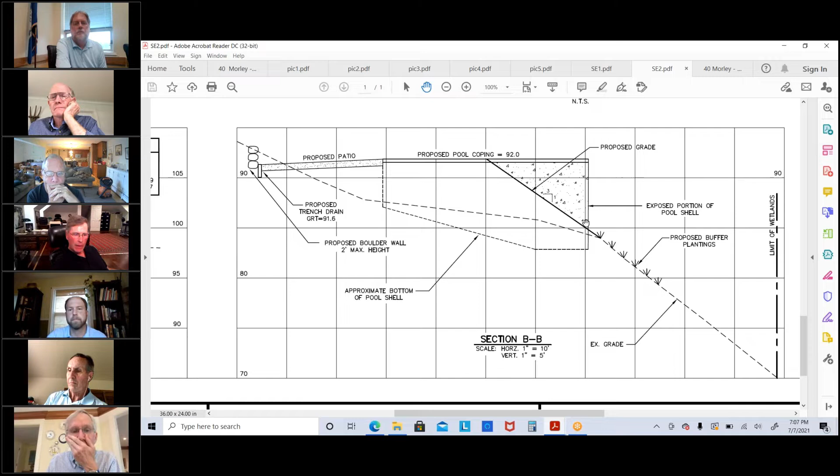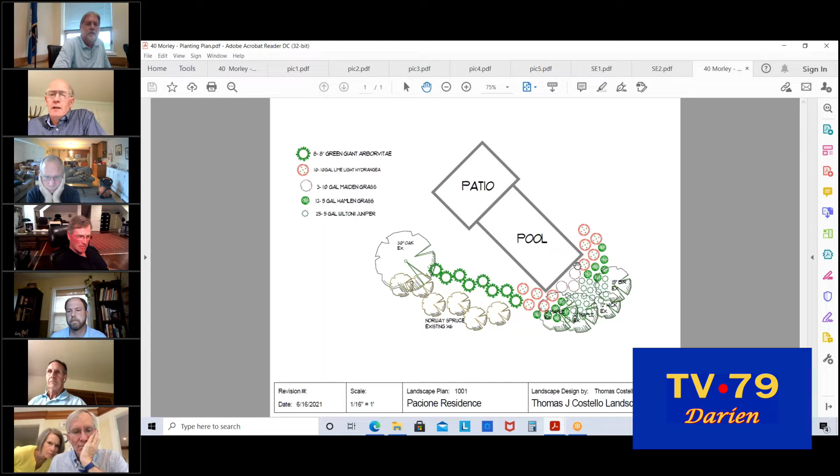Okay. Bill Wright, I'll start with you. Do you have any questions or comments? Yeah, how are you stabilizing the fill area, the 7 feet, approximately 7 feet, back from where the ledge is there? How are you stabilizing that toward the south?

This area in here, or? Right, yeah. I think the intent is that part of this are those existing spruce trees. So part of this will be the new arborvitae stand; up slope of that, the level areas immediately surrounding the pool will likely be lawn. And then obviously where the arborvitae is planted, the intention would be to mulch that. And then we have the silt fence with the staked hay bales to protect stuff until we get that ground

stabilized. So you don't think you need a retaining wall for 7 feet of fill that you're gonna have? Can you taper that down adequately? Yeah, this is the slope? This is graded at a 3-to-1 slope here. It's about 5 feet of fill at the worst location, I believe. The absolute lowest point in this backyard is about 87. That new pool coping is at 92. So we've got about 5 feet of fill to make up.

And I think the 3-to-1 slope is maintainable. It's not overly steep. It's certainly less steep than the bank that exists down to the wetlands. Yeah, okay. And the other question is the front area directly where the end of the pool is, where the drainage comes out a little further down? That's pretty steep there. You think you'll be able to hold that water back with the plantings you've got, without it charging down that steep hill? So this is really just an overflow mechanism.

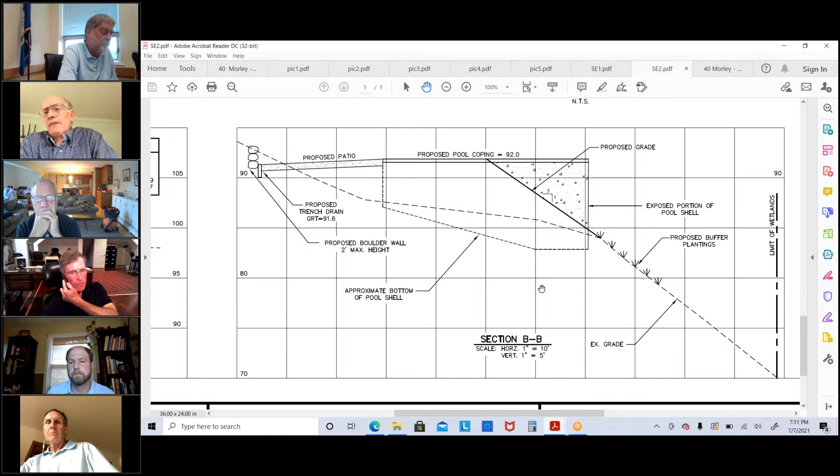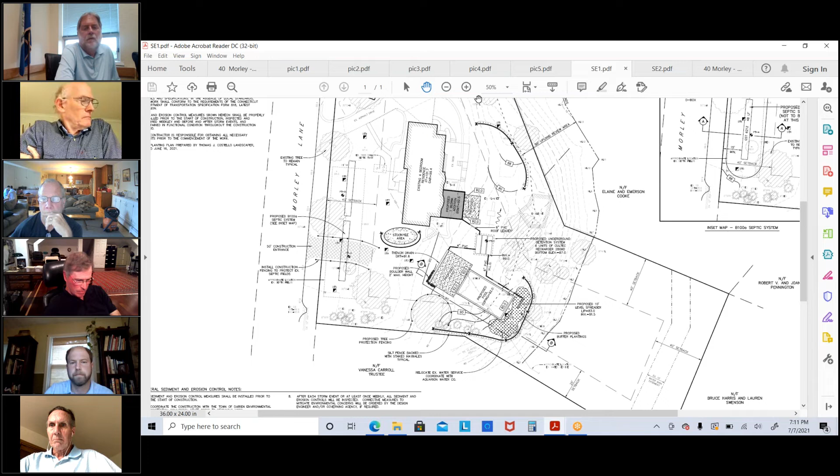Okay, Michael? Michael Urban? Tom, I just got a quick question. Per the proposed patio, it looks like abutting the pool is 92 foot of elevation. And then it looks like the linear patio drain is at elevation 89-ish. So my question is, is the design to take the sheet flow off the patio, put it in the linear drain, and then have it be detained in the buried Cultec, via that 4-inch PVC pipe?

Yep, that's exactly the goal here, to back pitch this patio from the pool coping to that trench drain. The grade of that drain is at 91.6. Probably the bottom of that drain is going to be at around 89 and change, and then that will be directed via this 4-inch PVC to that Cultec system. And is that linear drain for constant rainfall on the patio? Or is that in the case of a heavy rain event that the freeboard of the pool goes to zero and the overflow goes to that drain?

No, it's entirely designed for the runoff from the pool patio. As with any pool, the overflow mechanism is going to be via the filter outlet, and the pool equipment will be up closer to the house. So this is really just there to capture runoff from that patio. Where is the pool equipment located on the map? I don't have it shown on the map. My assumption would be that it would be kept near the other utilities. There's existing AC units up near the corner of the house, so that would be the most likely location for it.

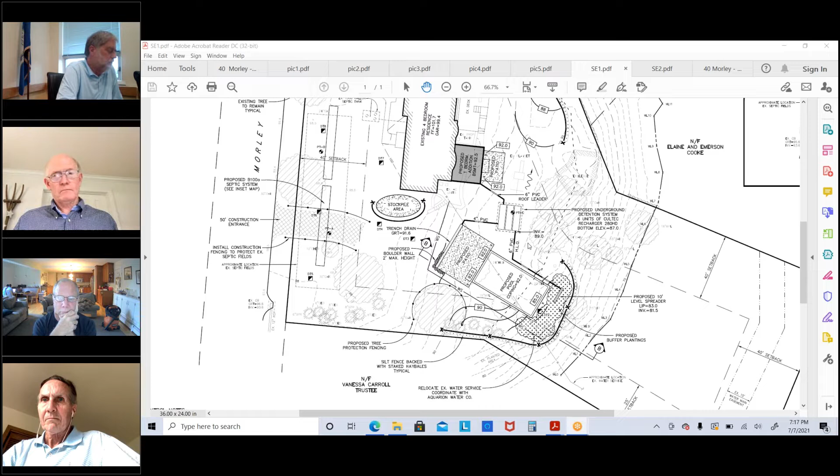Moving on to EPC 13-2021, 40 Morley LLC, 40 Morley Lane, proposing grading related to a pool and buffer restoration plantings in an upland review area. By the way, obviously, Mr. Millard's been slacking because it's renew area in the agenda. No, no, that's why I sent out the drafts just today. I realized that I didn't send a Word version. I can still, before I send it out, I'd be happy to take any. The site is shown on assessor's map number 6 as lot number 21. The public hearing closed on June 21.

Commission members, you have a draft here. So I assume Mr. Millard's done his normal due diligence in this. You sent it out late? Okay, so I'll be happy to take it within the next few days. I'm so glad to hear Rich say that, if I may jump in there, Eric, because I am out west with family, and I've been looking for those terrific advance notices that Rich always sends out. I haven't seen them, so I am remiss in sending back any comments, edits, or changes to our last meeting, or conditional approvals, which I will make it my business to do if it's okay with you, sir. That's fine.

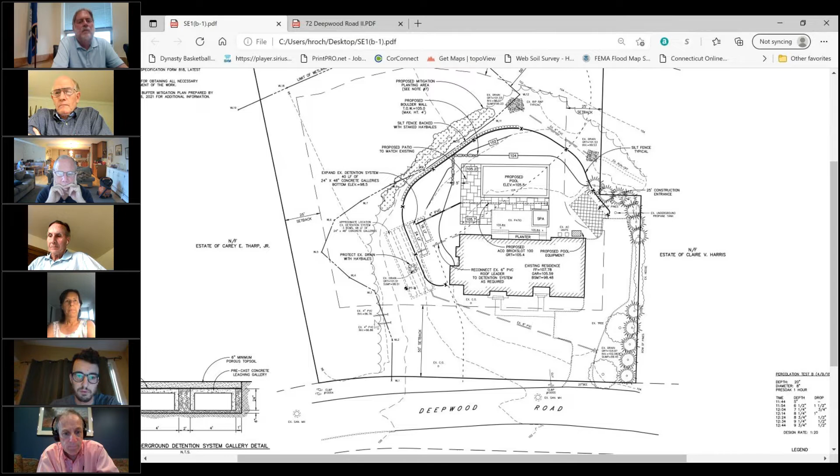And as part of the previous development, there's 2 4-inch PVC pipes here. I can only find one in the field. These are both shown in the survey. I believe one may have been a carryover from the previous house, but there's 2 shown on the survey, but there's only 1 existing there, and it's for the footing drains for the existing house.

So the project now is to further develop the property with a proposed pool and patio in the backyard. The patio will be a direct extension off of the existing patio, and a portion of the existing patio will now be taken up with an in-ground spa. Construction access will be via the existing driveway, as far away from the wetland area as we can be.

And the wetlands will be protected with silt fence during construction, and the closest portion of the disturbance to the wetlands will also be protected with hay bales to serve as a double barrier erosion and sedimentation control. The wetlands are shown here. And the 50-foot upland review area is shown here. So about half of the pool and patio are within the upland review area.

To limit the amount of filling that would be required to create the level pool and patio area, we're showing a retaining wall here that will be about 4 feet tall at its highest point in the corner here, and will taper down to level the patio.

To mitigate any disturbance from the construction, it is a generally flat area with pitch towards the wetlands, but we will be proposing a mitigated planting area shown in the hatched portion here, and that's taken from a planting plan prepared by Alexandra Mock, which I'm showing you now. I believe there's about 35 plantings proposed, all directly next to the disturbed area beyond the retaining wall and just beyond the silt fence.

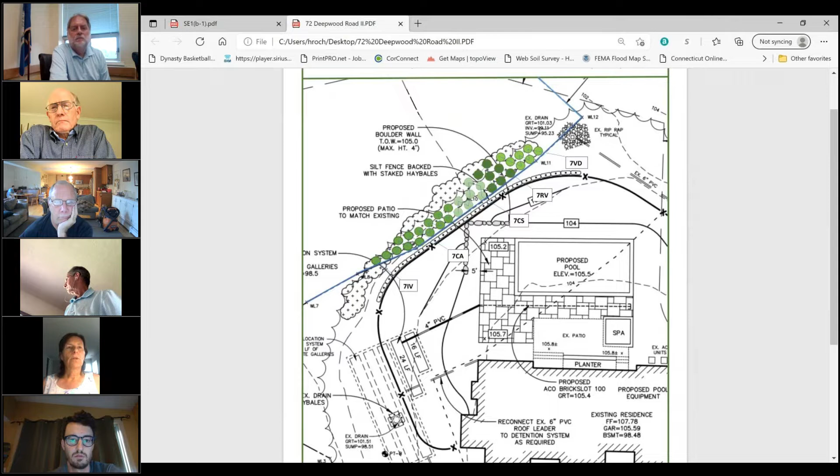Hello, this is Alexandra Mock, landscape designer, soil and wetland scientist. I did delineate the original wetland and also provided the planting plan for the pool. And the design of the approach to this area was just to reinforce the edges of the wetland, which is this area. And those edges are wooded.

This is a red maple swamp environment, which has several depressions which hold water during the wet season. And the edges are mostly developed with shrubs, and there is some herbaceous ground cover, mostly pachysandra and periwinkle. But the proposed planting plan with native shrubs will reinforce the buffer and will protect the wetland, will provide a little bit more privacy for the wetland and take some of the noise and activities around the pool and preserve the wildlife habitat.

So I see you're actually planting in the wetland. Yes, yes. And actually, the plants where they are located, they are really needed there, and they will really strengthen the wetland, will allow for a better environment, and will replace some of the pachysandra and periwinkle, which doesn't really belong there.

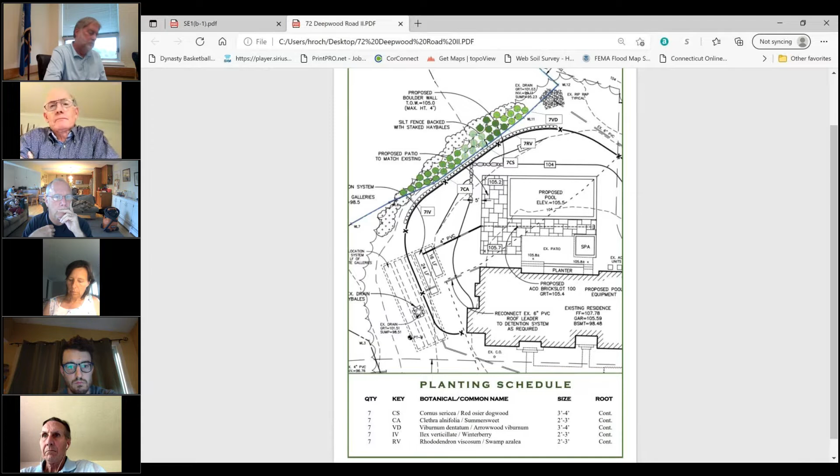Michael? I guess my first question, a takeaway from Bill, is was there any alternative considered to the location of the pool? I guess that's a question for the engineer representing the client. Yes, there were some alternatives taken, but as Bill sort of mentioned, there's an existing drainage runoff that comes through here, and this was part of the original development. So there's drains here and pipes over here. So we didn't want to get too close to that wet area either, where there's structures over there. It's essentially off of the existing patio now. Other than that, the central location for the pool made the most sense.

I'm looking. Where's the pool equipment located? Sorry, having some connection issues. It's located next to the existing AC units right here behind the house. Okay, I missed that. My apologies. No worries.

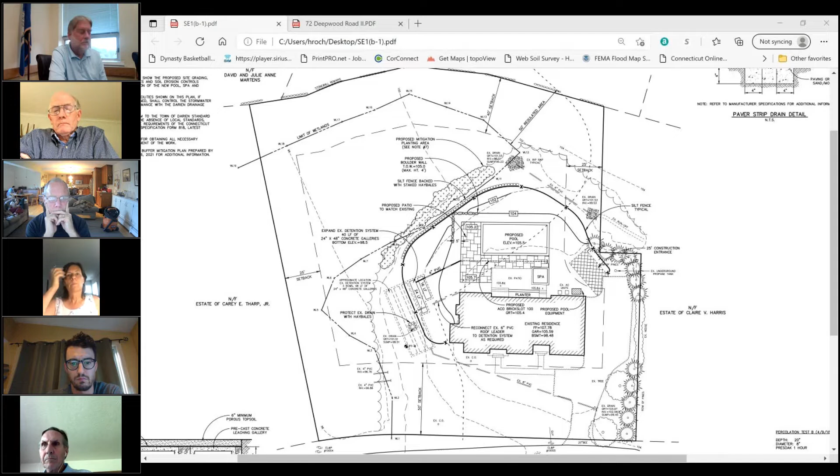Okay. Well, my comment to my fellow commissioners is, based on the pool being in such close proximity to the wetlands, I'd like to see a strong demarcation of the pool from the wetland. I'm looking for the compass direction. I would run top of wall parallel to the length of the pool and return it, a mirror image of what you have proposed on plan. So there'll effectively be a horseshoe shape of stone wall to demarcate the pool from the wetland. That's all I have for comments and questions.

Yes, Eric. Again, with apologies to all on this call, I'm at a bit of a disadvantage having been out here in the West for a bit of an extended time. So I have not visited the site and appreciate Bill Wright's comments about once again trying to fit in a pool in an area that is so proximate to existing wetlands.

I think our fellow commissioner, Michael Irvin, makes some very valid points in what his comments just said. So I will again not try to add to anything that these two gentlemen have said, but to endorse what both said and ask that the applicant include them in any revised plans for us to revisit. Thank you, Jim.

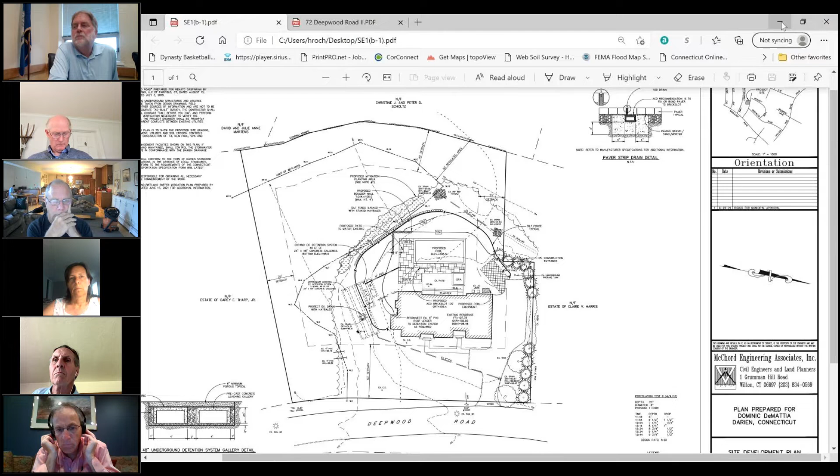I think I only caught the tail end, and the gist was to relocate the spa within the pool to decrease the patio while moving the pool east closer to the house and further from the wetlands. I think we could gain about 10 feet of separation, and if we were to horseshoe the retaining wall as well, probably maybe 15 feet further from where it's currently shown.

If that was the totality of the comment. Sorry, my machine keeps cutting in and out. I think you got it.

So do you want to examine that? Yes, absolutely. And I don't know if that was going to be a condition or another meeting was to happen. I may have missed that part, but we'll certainly look at the alternative.

What I think you need to do, Harry, is review that with the applicant, because I don't think it's an appropriate condition. I don't think I can write those conditions. I think you should review it and come up with a revised plan.

Okay, so then we can review it in August. Okay, understood. Does that make sense? Yes, okay.

Absolutely. Okay, so given that's a major change, and that's going to change the drawings as well as the wetland and the wetland buffer, etc., that Alexandra did, I think what we should do is just keep things open until next time, and then we'll see what you come up with.

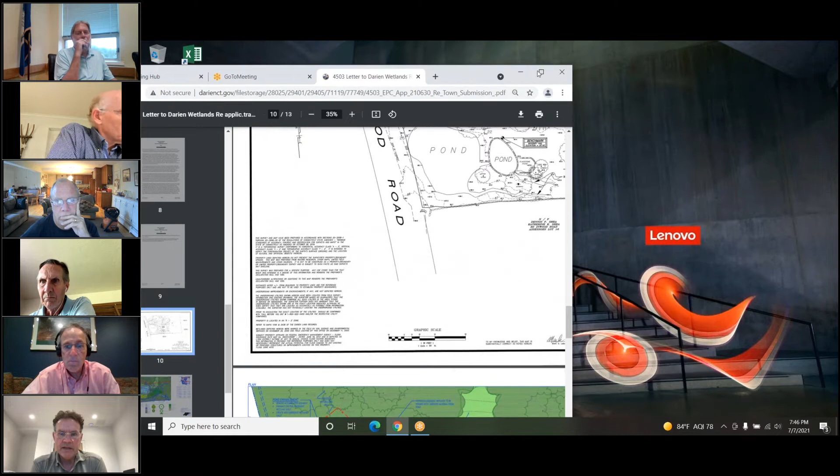It's a very interesting project. They have a small man-made pond on their property, and immediately adjacent to the pond is an interesting concrete pool that is many decades old and is stream-fed. It was constructed many decades ago, actually in the wetland, labeled on the survey as a pond. This drawing is the existing condition survey - on the left you can see the pond, and immediately to the right is the concrete pool that has a small stream running into it, and there's a second stream that runs into the pond.

The owner proposes to remove the concrete pool and just reestablish a watercourse and wetland through that area. In addition to removing the pond, there's a small stone patio in the bottom right-hand corner of that pool area, with a stone fire pit and stone walls bordering the patio. So they would remove the patio, the stone walls, the fire pit, and the concrete stream-fed pool, and naturalize a wetland and watercourse area in that location.

At the same time, they'd do enhancements to the pond on the left, which has become sediment-filled and is very unhealthy now. They would take that pond, which is only a couple feet deep in most areas, remove all the accumulated sediment, and deepen it to at least about 6 feet at its deepest point. This helps diversify and improve habitat for finfish, giving a deeper refuge area during hot summer days and during a deep freeze in cold winter.

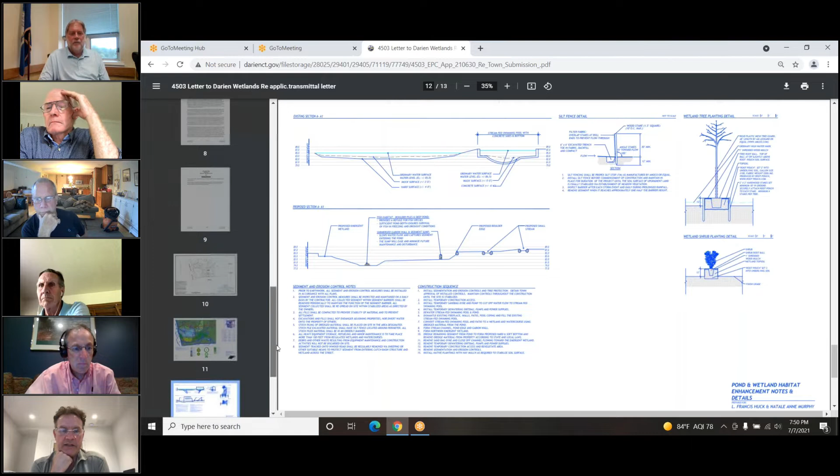We've provided two drawings. One is the plan view with a detailed plant list of the variety of plants being proposed for installation. The second sheet has two sections through the pond - the section shown at the top is the existing condition, where you can see the pond on the left and the swimming pool on the right. The section below is the proposed condition, where we would deepen the pond, eliminate the swimming pool, and create a wetland habitat where the pool is.

So it's a bit unusual - usually we're here to ask for permission to build a pool, and here we're asking for permission to remove one.

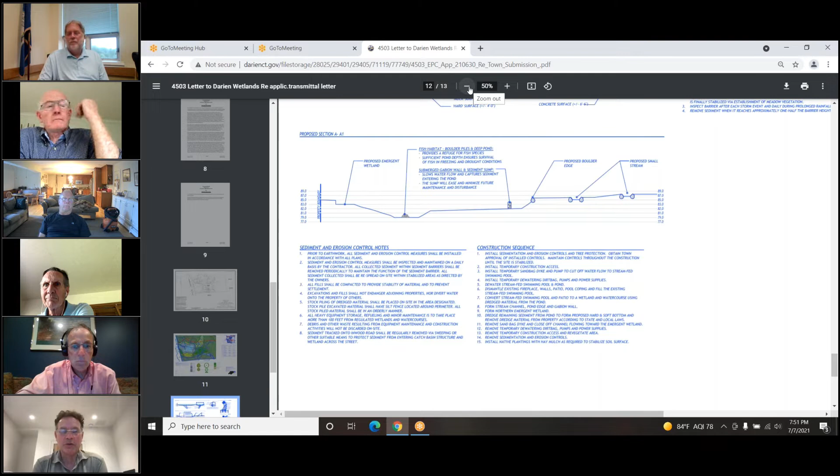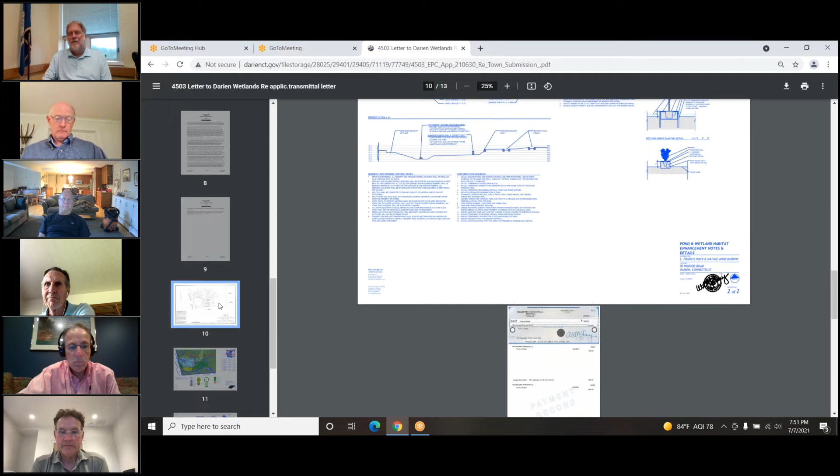So please, answer any questions you might have. Pretty ironic, right? Yeah, absolutely, pretty interesting.

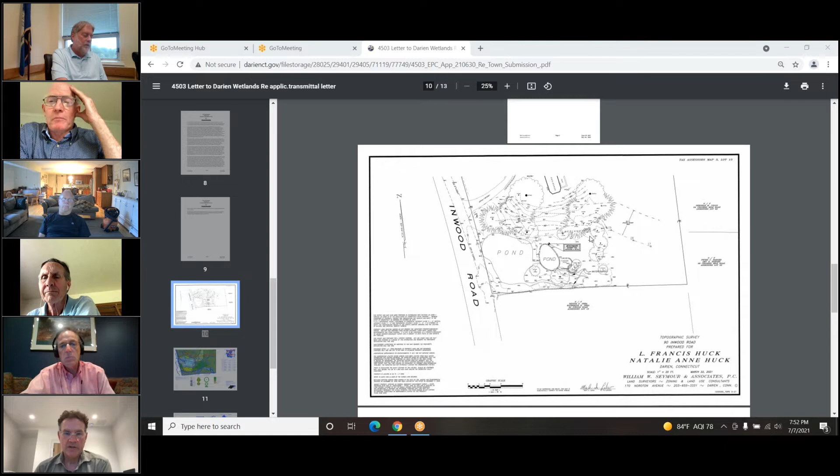Have the commissioners - Bill Wright, why don't you start? Okay, yeah, I think it's an interesting project, and I commend that we're going in that direction on this one. That's nice. A couple questions though, more of an engineering one: how do you stabilize the new dredge material you're putting on the periphery of the pond so it doesn't just slump back down? Are you putting up some kind of riprap, or how do you make sure that doesn't just ooze back down into the deeper hole?

Sure. So we've used both stone and coir logs in the past to help achieve that.

So we would look to do that and create a berm to hold back that material. So the green area separating from the blue area, would you put a log lineup or some sort across that, or is that what that is?

I'm not familiar with the procedure for that material. So the coir log is a material made from the husk of a coconut, and they make these in everything from about a 6-inch diameter up to 18 inches or so in diameter. They're very flexible, and come in lengths of about 10 feet. They're very durable, and persist in the environment. They're biodegradable, but they'll persist in a saturated condition like this for 3 to 5 years, allowing time for that material to settle and for plant life to become established.

So the material, because you're digging pretty deep, you won't be using all of it on site. Some of it will have to be trucked off. Correct, and some of it will be used to backfill the pool area.

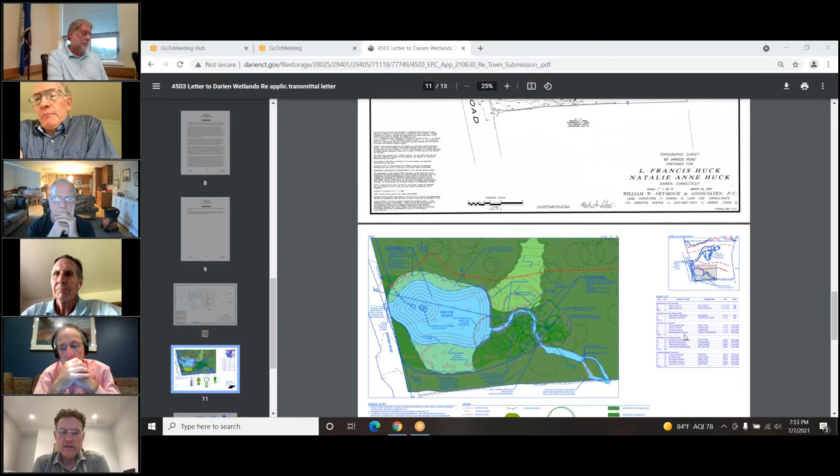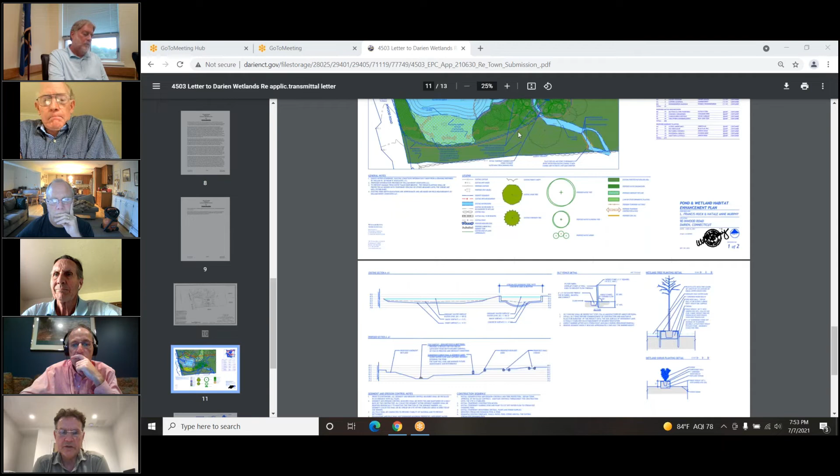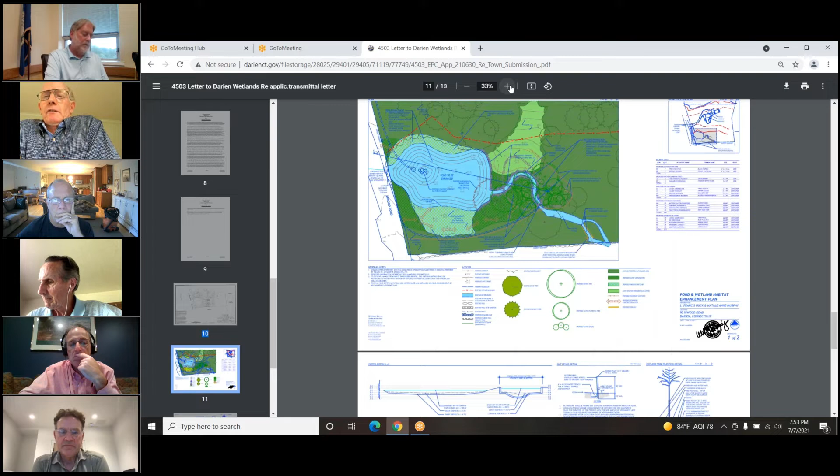Protection wise, that one beautiful 30-inch beech is pretty phenomenal. I assume you're going to keep any heavy equipment away from the roots on that one. Yes, we will. And that you're referring to the beech, I think it's northeast. Yes. So we'll just have access primarily from the southern portion, and maybe minimal from the northwest. So in the future, when you do dredging or maintenance dredging on that sump, you'd have to come from the other angle down through the lawn, I guess. Is that the plan? Yes.

The other item I had is on the outflow, which is in that drainage right next to the road, catch basin. Are you going to put some kind of filter on that? Because when this work gets going, or when you first flood it, you're probably going to get silt. You're going to have some kind of mechanism to prevent silt from going down? Sure, that's a good idea. We could add a silt sack, a sediment trap to that inlet.

During construction, the pond itself becomes a sediment trap because we'll dewater it, so there'll be a lot of stored volume there. But shortly after construction, when the pond fills back up with water, if you have a big rain, a monster rain, right after you've done this, you might get some of that sediment roil up in there, and you don't want that, because it goes onto the neighbor's property on the other side of the road. So yes, you don't want that. Okay, that's all the questions I have.

Thank you, Bill. Michael Urban? Bill, who's the pond dredger? I knew someone was going to ask that, and his name has slipped my mind. I'm going to look it up. I'll have it for you in a minute.

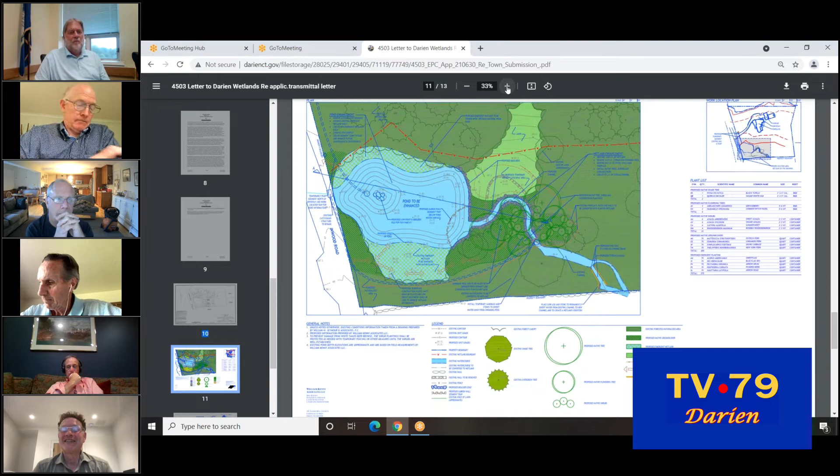While you're looking that up, boulders along pond banks are, to my understanding, a good measure to prevent erosion into the pond. Is that why you proposed the boulders? Just in that, yes, they're certainly very helpful for preventing erosion and holding the bank up. But that doesn't sound like the reason why you put them there. No, actually, it is. It helps to have a nice, clean vertical edge. The stone helps you get that vertical edge to the bank. If you don't have that, it tends to be a zone where there's more difficulty with invasive species such as Phragmites, common reedgrass. So it's helpful right on that edge to have something like that.

And in the bend portion of the pond, the brook or the stream, as you may call it, does having the stone along the bank increase the velocity of the water? It can in certain situations, but the flow here is very minimal. It's very low flow through this area, it's not a large river by any means. Okay, very good.

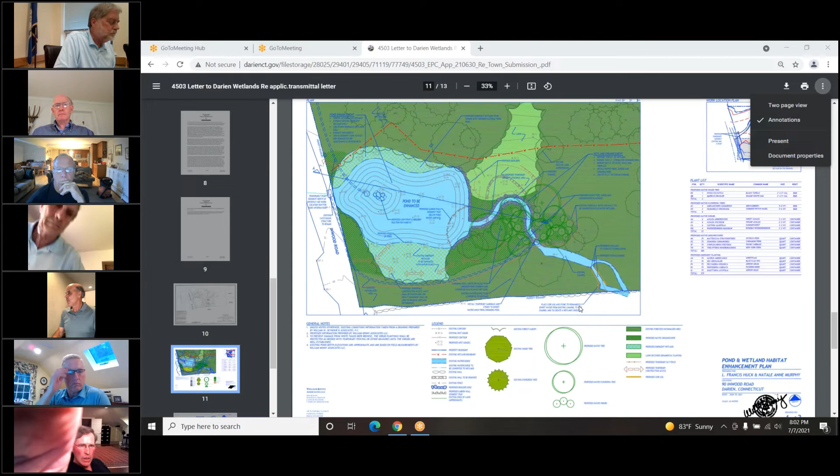Okay. Bye-bye. Moving on to the public hearing, EPC 25-2021, Brandon and Megan Cobalt, 54 Gardner Street, proposing a replacement house and related construction in an upland review area. The site is shown on assessor's map number 45 and lot number 124. Doug, I believe you're representing them. Yes, I am. Jeremy, can I have the presenter, please? There you go, Doug. Thank you.

Doug, you got it? Not yet. Should I give it to the other Doug? You might have, yeah. Let me try the other Doug. That's it. Okay, now we're trying. There we go. Got it. Yep. Okay, great. Thank you. Okay. Over there.

There's an existing house. This property is approximately 0.67 acres or 29,525 square feet. There is an existing house on the lot that was constructed in 1922 according to the assessor's card. The property was flagged for wetlands, which was found along the, let's see, get this blown up a little bit so you can see it a little better.

Wetlands are found right where my cursor is, coming down and across. So the lighter green area is the wetlands. Jim McManus, the soil scientist, is also on this call, and he'll be able to describe the wetlands in more details and talk a little more about the plantings we've got proposed here.

Current access to the property is through a driveway that's right at the intersection of Gardner and Coach Lamp, which is kind of an awkward situation, to a gravel driveway servicing the house. There is a drainage ditch that runs north and south to a pipe, an 18-inch RCP or reinforced concrete pipe, to a catch basin on Coach Lamp Lane.

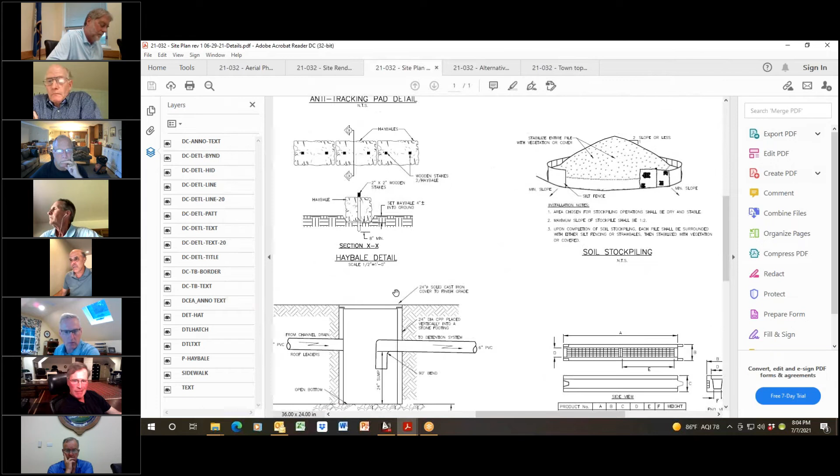And at the last meeting, we presented this as just an overview of it. The commission had asked us to provide a sump area and clean out the entrance to the pipe to allow the water to flow more freely through the culvert out to this town drainage system. And we provided a detail of that sump area.

So the flow is coming in from the north into a sump area that's approximately 2 feet deep with some flat field stone in there and about 5 to 8 feet long. And we'll provide a trash rack on the inlet end and on the sides to prevent any more debris from building up and causing any kind of potential problems or flooding in the area. So I think we've addressed that comment from the commission from last time.

The proposal is to raze the existing residence and construct a new residence behind the building setback. The current house is not compliant with the zoning regulations. The new house will be compliant with the zoning regulations, placed behind the front yard setbacks on Gardiner and on Coach Lamp. The house was shifted to the farthest point south to provide additional buffering between the house to the north and the proposed house. The property slopes from west, which is on the Gardiner side, to an easterly direction towards the ditch on the property.

It is proposed to install a detention system partly under the driveway and partly off the driveway to handle the runoff from the roof area, the driveway, which is a trench drain at the property line, and any drainage that flows from the front of the house into the driveway and into the trench drain will go into our detention system.

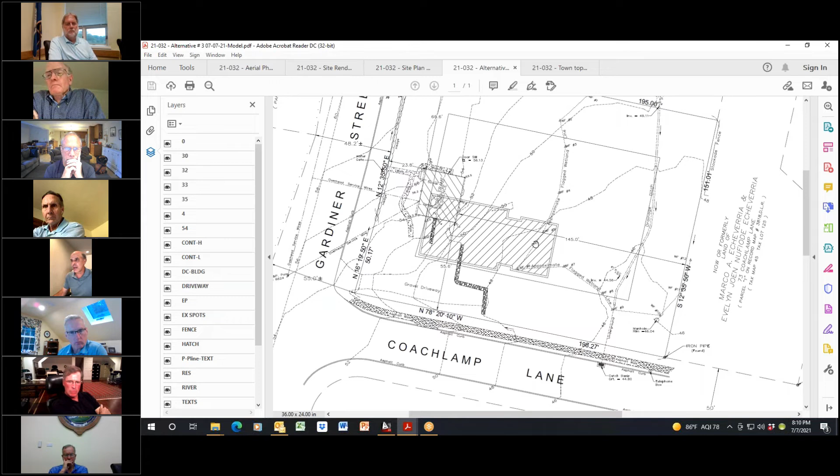In terms of options, we looked at taking the house and rotating it so the front of the house would be facing Coach Lamp, using the same footprint of the house. And you can see this is the wetlands area here. By doing that, this portion of the house would be into the wetlands and filling the wetlands area. It would provide a backyard area, but again, we're filling the wetlands. So this was a feasible option that we thought of. But again, with the amount of disturbance going into the wetlands, we didn't think that was a very feasible and prudent alternative.

So therefore, we went with the alternative of providing the house still facing Gardiner, parallel to Gardiner, the narrow portion of the house, and then just providing grading off a patio towards the wetlands area, and then the maintained lawn area that is currently there can be used as the backyard for our client.

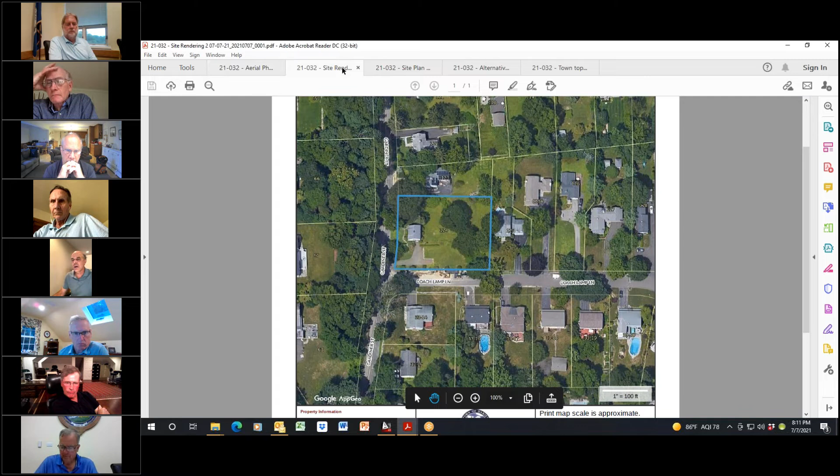We did get a couple of comments, letters from the neighbors. One is number 71 Coach Lamp, and the other one was number 73. 71 is the house directly east of ours, and 73 is the house one over from 71. I'll just go through those comments and answer them at this point. There was one comment about flooding issues in the drainage ditch. We were aware of this. My client did talk to the neighbor when they've been out there many times.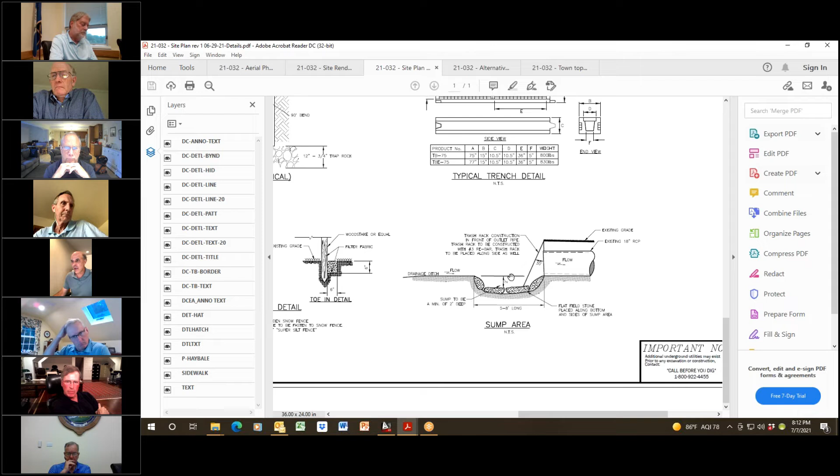This area does flood, but opening up the outlet of the 18-inch RCP pipe will provide an area for water to continue to flow through, with a trash rack on an angle like we're proposing, like this. So when water does fill up and there's any kind of debris here, it will push it up the incline of the trash rack and allow the water to continue to flow through. So by providing the trash rack and the sump area to collect any debris, we feel that's going to greatly relieve any kind of flooding that may have occurred in that area.

The detention system, the question was about the design of the detention system. That was designed based on the planning and zoning regulations for the 2, 10, 25, and 50-year design storms. So we are showing a decrease in runoff, so there's no increase in runoff. We also used the fresh meadow method of calculating, so we got no credit for the existing dwelling. We looked at this as a vacant lot and then designed it, which is a conservative way of doing it.

The junction box located on the inlet side of the detention system will have a 2-foot sump in it, an open bottom. So a 2-foot sump will collect any debris that may have fallen on the roof and gotten through the gutters into the drainage system. Any sediment that may have fallen through the trench drain will be collected in the sump of the junction box before it goes out into the detention system. The junction box will have to be inspected annually, and any debris shall be removed. It can be done with a post hole digger or a small shovel. It is 2 foot in diameter, so access should be fairly easy.

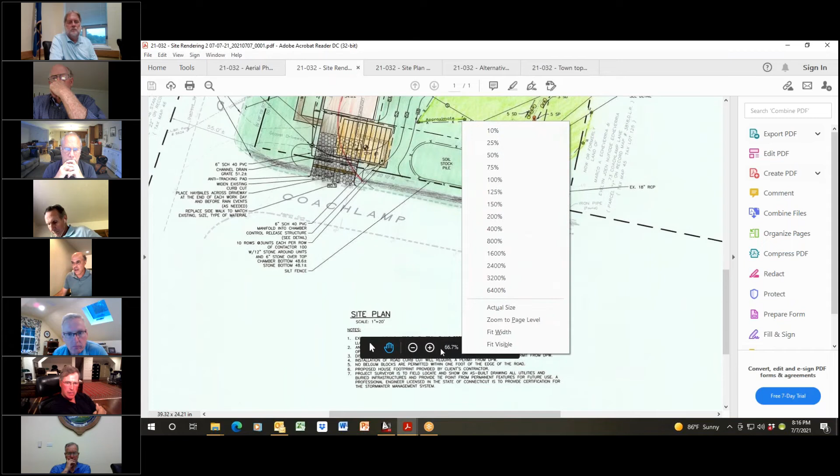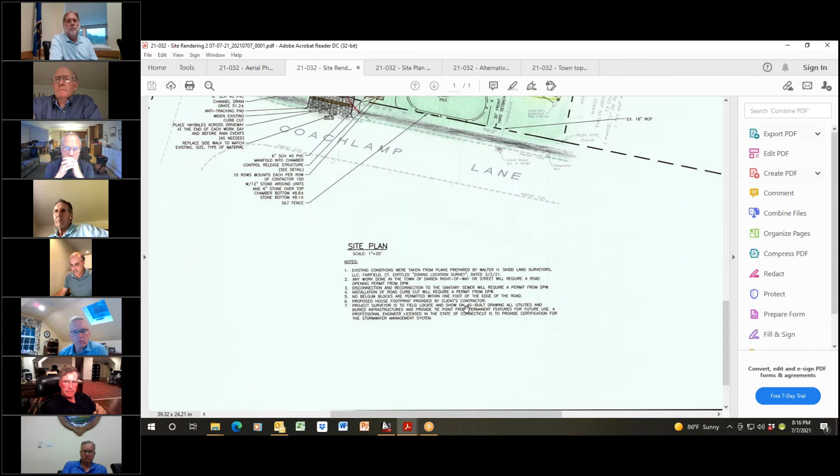And there's also question number 7 regarding the need for a driveway opening permit. We also noted that on our plan as well. And then the other questions were basically just noted questions, and then reduction in peak flow. And then we have also provided the connection and disconnection form that's required by DPW, that the Department of Public Works is asking us to do now.

And then the last question was regarding an as-built of any subsurface drainage. Again, the piping, the detention system will be shown on a final as-built by the surveyor. At this point, I'd like to ask Jim McManus to discuss the wetlands, the plantings that he's proposed over here, and the function of the wetlands itself. Jim, you want to take over now?

Okay, good evening, Jim McManus, Certified Professional Soil Scientist, JMM Wetland Consulting Services, offices in Newtown. Back on March 24th of this year, I visited the site to review, get a sense of what it is and gather information for the report I hope you all have in front of you.

As Doug mentioned, there is one wetland area, which is a disturbed wet maintained lawn located along the eastern portion of the site with a very narrow ditch associated with it that carries flow from a PVC pipe at the northern part, and it heads in a southerly direction, as Doug said, to a pipe which heads into the Coachlamp drainage system.

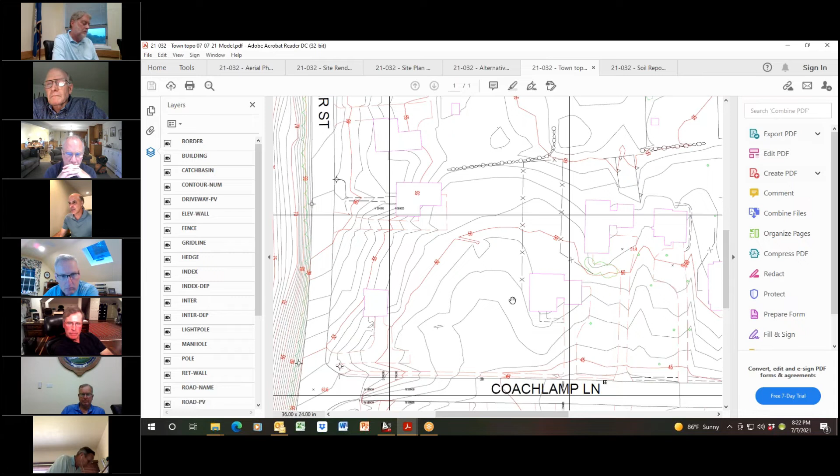Well, I think this, Bill, this is the town topo. Yep. This will probably give you an indication of what's going on out there. This is our site here. This is the neighbor's house, the 71 Coach Lamp. And you can see this is a swale going in through here. So if we were to berm this up, I think we would stop any water that was flowing in this direction and leave it on their property. By keeping it as a lawn area as it currently does, it'll continue that flow into that ditch and then down into the drainage system into Coachlamp Lane.

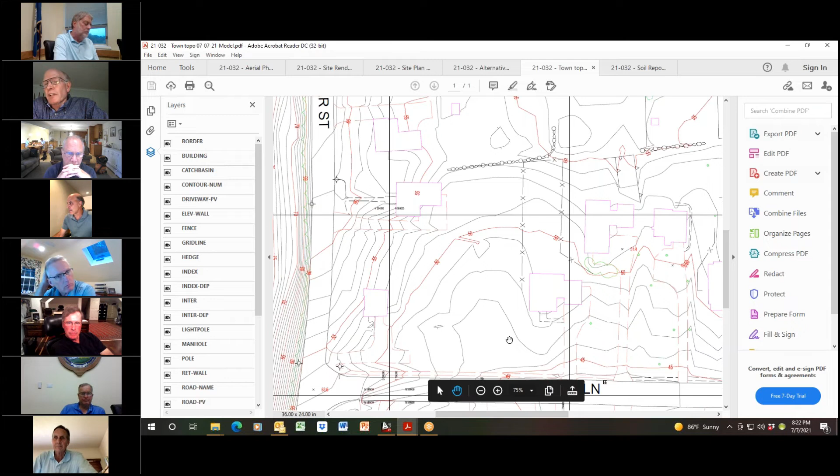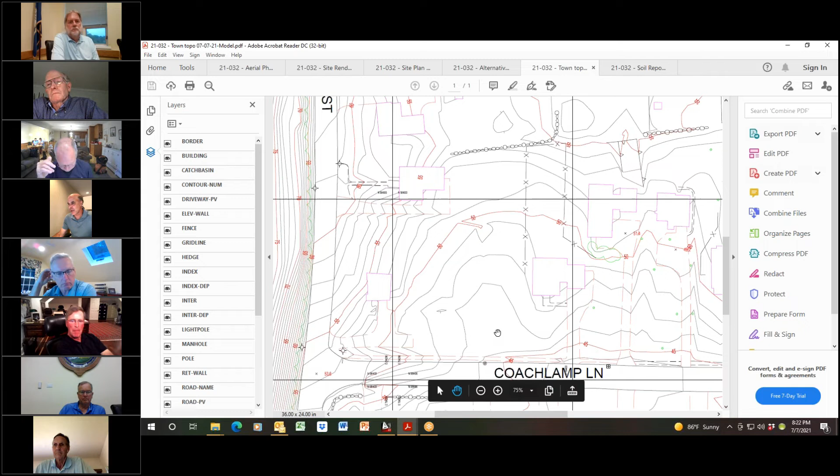So what you're saying is that ditch is also helping the neighbors as well? Correct. I think the flooding again, if you were out there, you'll see that the pipe, there's a lot of forsythia bushes around here, and you really can't even see the pipe that's there. Once that gets cleared out, it's our opinion that this will alleviate any kind of flooding that may have occurred in this area.

Okay. The other item, do you have any idea what shape that sewer line is in? Because obviously if there's a break, it's going downhill, going into that, and it's going right out in Holly Pond. So I'm kind of concerned about what shape that line is. We don't know. I don't know off the top of my head. We know it was working. We put water or dye into the system in the existing house, and it came through to the manhole that's on this property, right where my cursor is right now.

I don't know. Do you ever do a quick scope, just in a situation where it's a little concerning what would happen if it did break? I don't remember if it's PVC pipe or if it's a tile pipe. If it's a PVC pipe, I would suspect that it would be in good condition. Mark, you remember what this was? Yeah, we did the disconnection from the existing house for the demolition permit. It's a metal pipe. It's in great shape. We tested it several times when it was connected to the house. It's in very good shape.

Metal pipe. So what year would that have been, do you think? I think this was done in the 70s, possibly, the sewer lines in this area. I don't know if a developer is in charge of worrying about a sewer line, but somebody ought to be, just in case, when you're going into it. The developer is responsible for it for at least the first year. So we are concerned about it. And it's a cast iron pipe. It was in good shape.

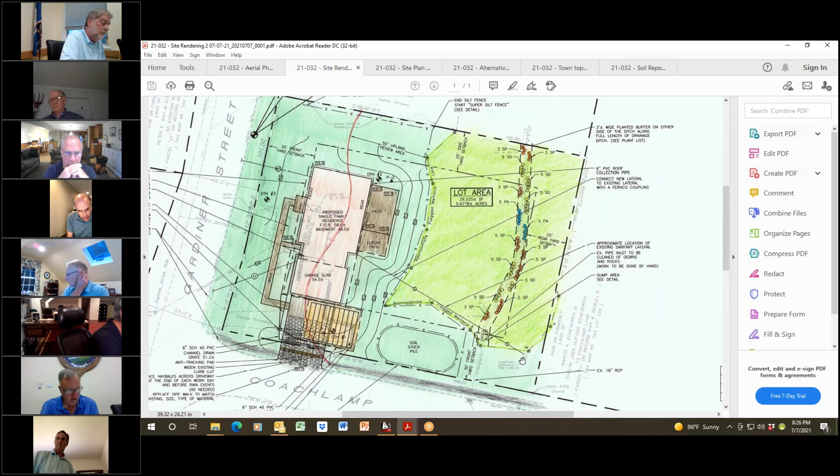Okay, the system you're talking about, the question came from number 71, Coach Lamp, right? Yeah, I have it near the end, there's 1, 2, 3, 4 at the end. Obviously the system is not there to support a 100-year storm because the state and local regs are for a 50-year storm.

Correct. And again, we're doing a very conservative approach here. We're looking at it as a fresh meadow calculation, so we're not taking any credit for any of the existing conditions. That's a very conservative way of doing it.

The buildup, question number 3, could the sediment buildup cause the system to fail? Well, that's why I put in a junction box in front of it. The junction box will collect any sediment, with a 2-foot sump, and also has an open bottom, so there's no standing water in the system during rain events. After rain events, the water will seep out, and this area is where you can do your maintenance and cleaning out of any sediment collected there.

And who will inspect and ensure the maintenance of the system has been done and continues to function properly? That's going to be up to the homeowner. These systems should be inspected annually for any accumulation of silts and sediments, and it can be cleaned out because the manhole will be at the finished grade, so they can open it up very easily to clean out. This can be done by the homeowner or by maintenance people, like the lawn people who take care of the property.

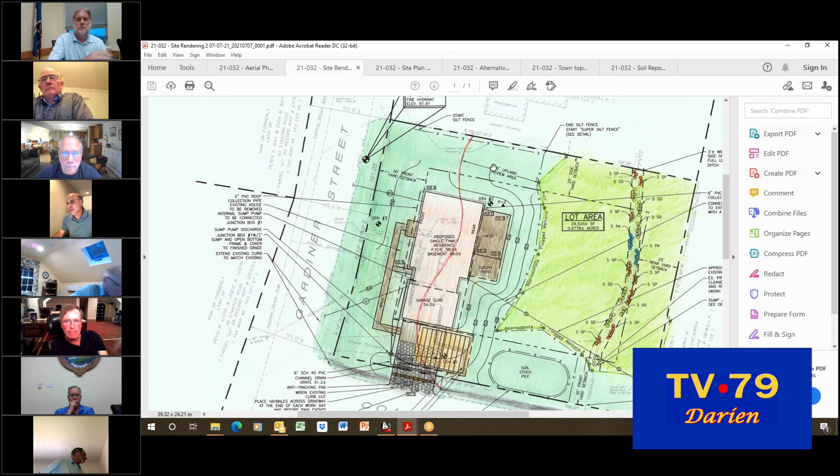Okay, no problem. You're talking about the 52 contour right here—this is a 25-foot setback right here, so you're probably talking 20 feet from your property line to the edge of the grading. That's the closest, and the soil scientist I consulted said 20 feet is the closest; if there's no regrading within 20 feet, there'll be no impact. So I feel good with that answer. Thank you—you noted that you're going to put a silt fence up all the way along that property line.

That silt fence—there's bushes, a cork bush, forsythia. What's going to happen to all the plantings? How are you going to get that fence in there? Well, we're showing a silt fence here, but we'll have to field adjust it to go around those plants in there.

The contractor did advise me of that. So what will probably end up happening is that the silt fence will run in along and around those plants, because we want to keep that area as a buffer between this house and your house too. So that'll be field adjusted.

I understand. It might be difficult because some of the regrading is going to actually go into those plants, so those plants are in jeopardy anyway, I think. I guess my last question is, there's quite a number of trees and plants between this house and my property, and this house in particular—there's a huge oak tree in the northwest corner, and it's huge.

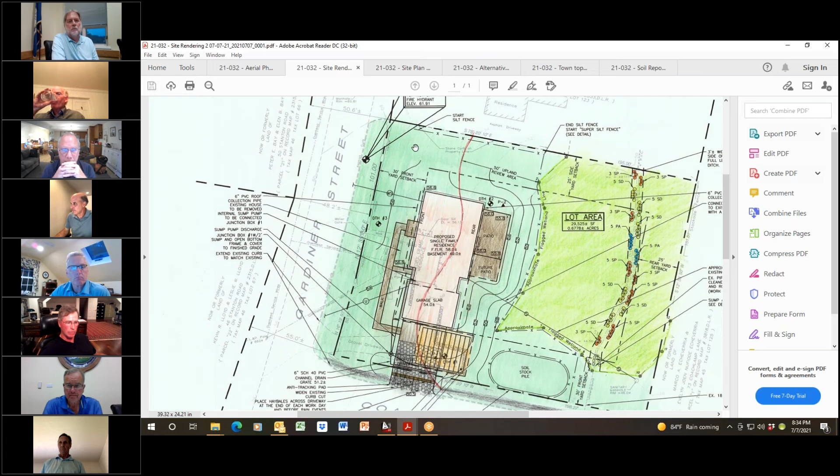Eric, I think you're muted.

Is there any further member of the public that would like to speak? No? Okay, is there a commission member that would like to have a final question or comment? No? Okay, Jim, may I have a motion to close the public hearing?

Yes, Mr. Chairman, I move to close the public hearing of tonight's meeting for the Gardiner Street Coach Lamp Lane project. Good, Michael Urban, may I have a second? Second. Then without objections, so moved. So the public hearing is closed.

We'll move on now to the amendment of regulated wetlands and watercourses map.

Thank you very much, Eric. Have a good evening. Thank you, Doug, for a great presentation. Thank you. Thank you, Doug. Thank you.

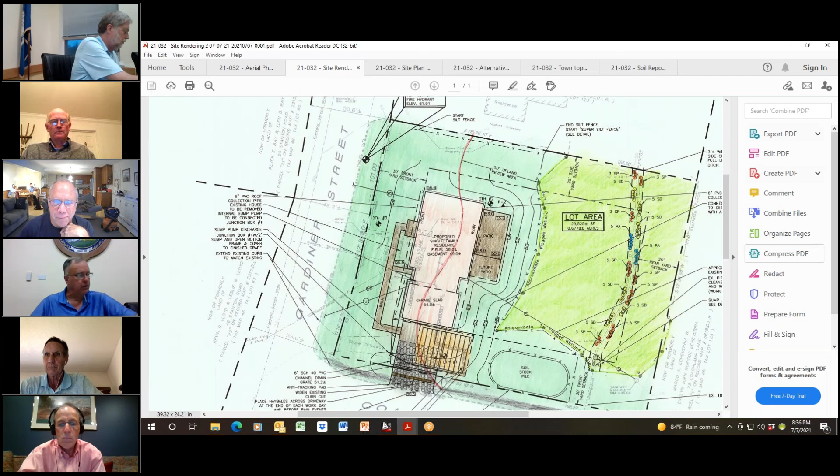Okay, Rich, I didn't get that map. Did I get that map? I didn't either. I sent out a draft. Okay, they're fairly large, but I can send out the list of properties. We accumulate over, in this case, 2 years. Why don't you go through, I don't know if Michael's been through this process, or Bill—go through why we have to approve it, et cetera.

Right, so over the course of 18 months, in this case 2 years, we periodically take all of the surveys we get, which are site specific to all the applications we reviewed, and we update the town map. You've seen the town map where there are cases an entire property is wetland, and there's a house on it—so there are a number of those. But in any event, every time we get a survey, we just keep track of them.

We have a GIS consultant, and in this case there were about 35—they're always in the neighborhood of 35, 40. We just update the town map, pick an effective date, publish, file with the town clerk, send it to DEP, and it becomes the new effective town map. That's pretty much it. We typically don't get public comment because all these are from people who've actually submitted their surveys, so usually there's no objection involved.